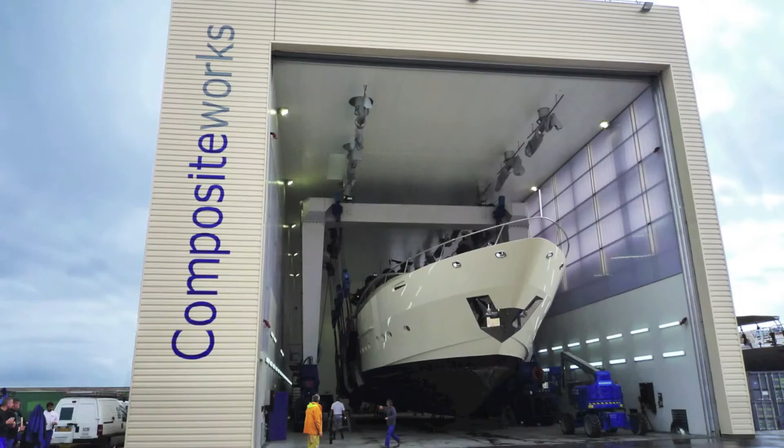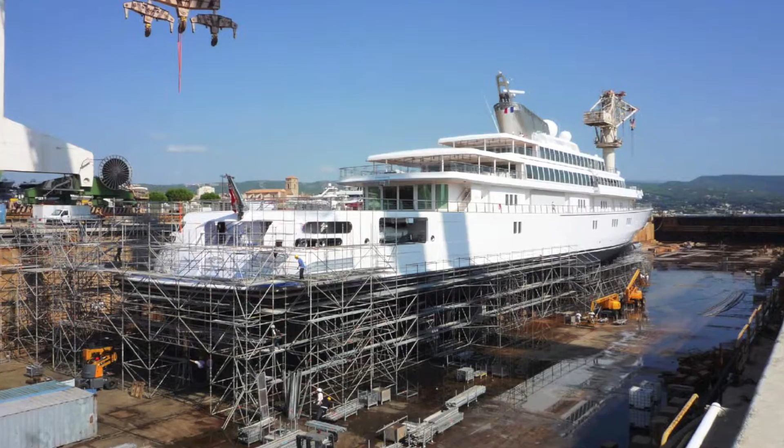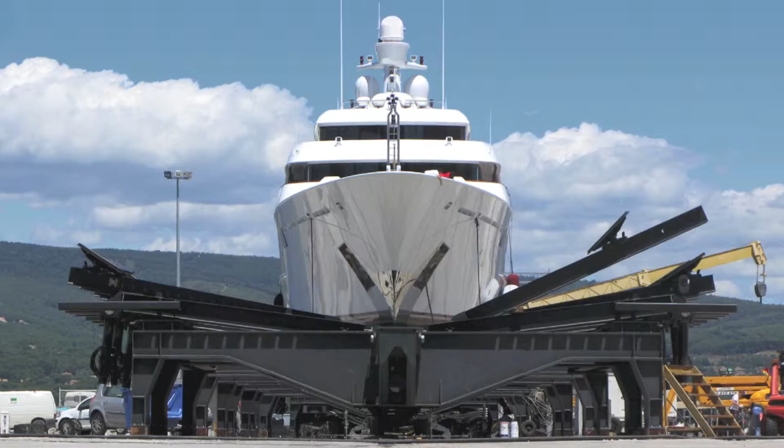At the heart of this hub is Compositeworks, founded in 1998, one of 34 specialist companies based on site. The site itself is run as a cooperative by Semidep, a government-funded company that maintains the communal facilities including the 2,000-ton Synchrolift and the 360-metre dry dock.

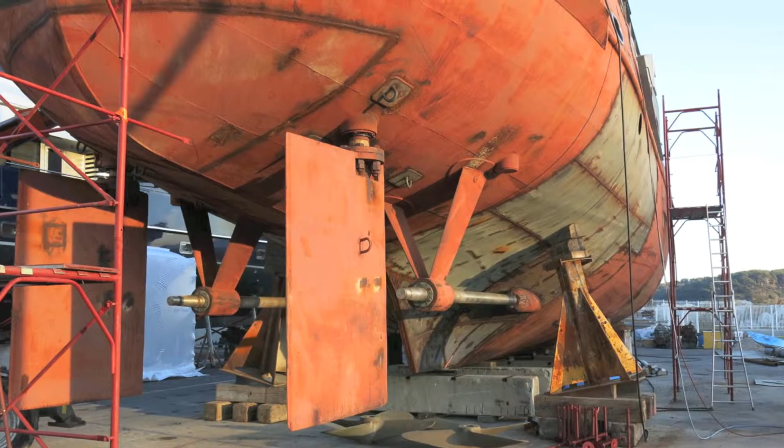With Compositeworks recently completing its 800th refit, we asked Operations Director Rob Papworth how the company was performing. We did have a sort of slightly static period for a couple of years, and now we've definitely moved on again. This year we're due to increase our turnover by around 20%, which is a pretty decent jump in the state of the market right now.

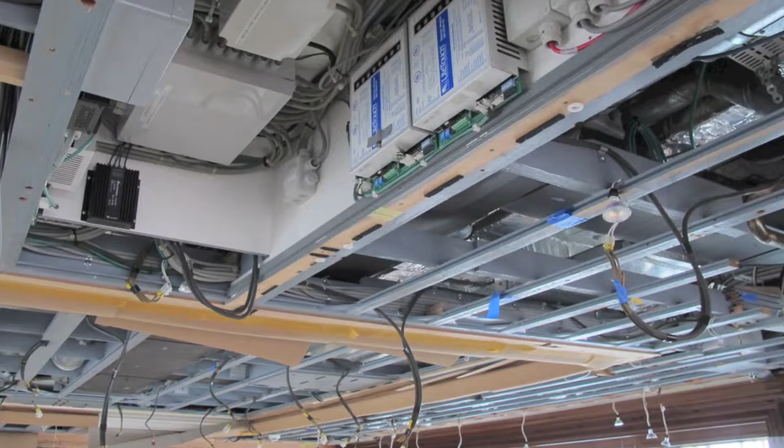We've seen an increasing amount of American clients. We believe that a lot of the difference comes from people really beginning to trust in the refit industry as a whole, and there's a group of yards, I think, that people are beginning to trust as much as new build yards, and the scope of works being done now in refit yards is becoming increasingly large, whereas before people were definitely taking vessels for modifications back to the new build yards.

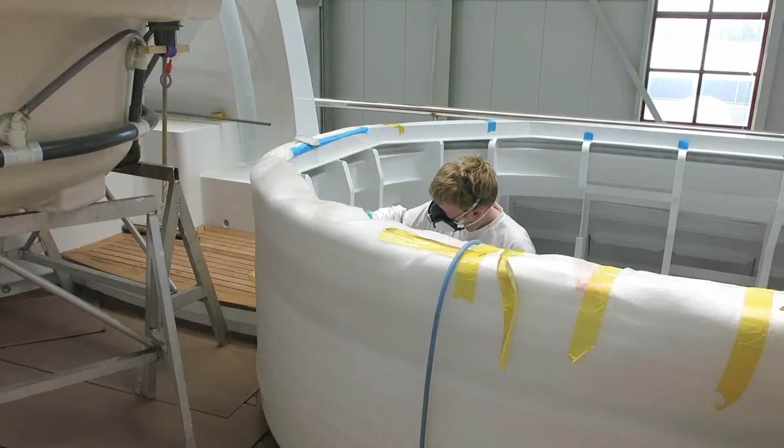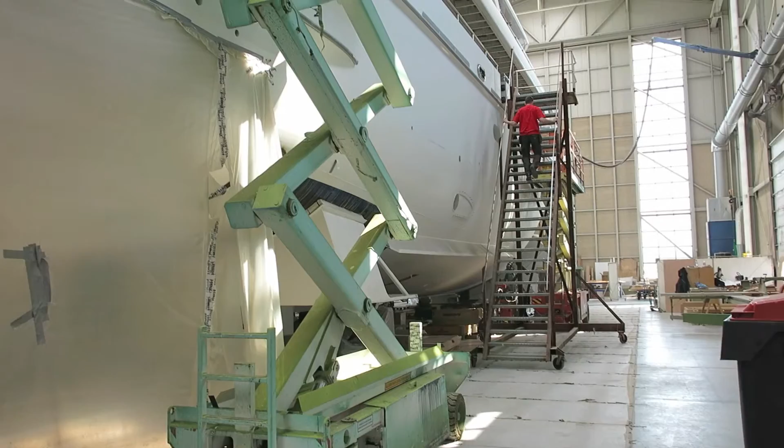There are a lot of vessels on the market at the moment, and people are doing modification works to low cost purchases. The large yards are very full at the moment, and people with 80 metre plus boats, if you want a new 80 metre plus boat from a reputable yard, it's quite likely you'll have quite a long wait, and people in that kind of market that decide they want a new cinema or a new swimming pool or whatever, they're not going to wait 5 years to get it on their new boat, so they're doing those modifications right now. We at Compositeworks have certainly seen a lot of growth in the 80 plus metre market and the 100 plus metre market as well.

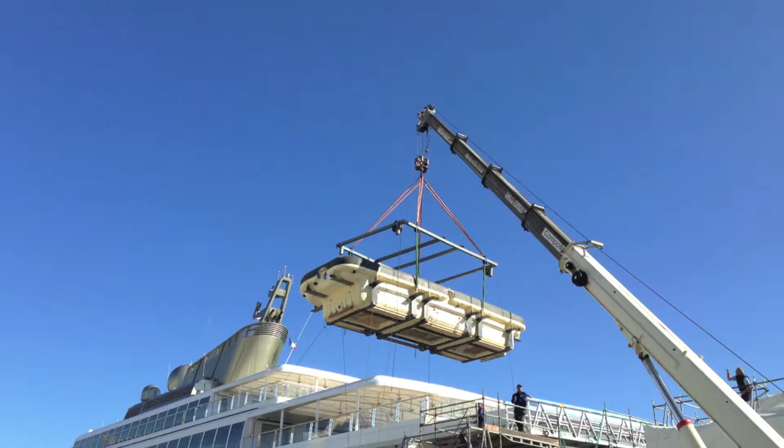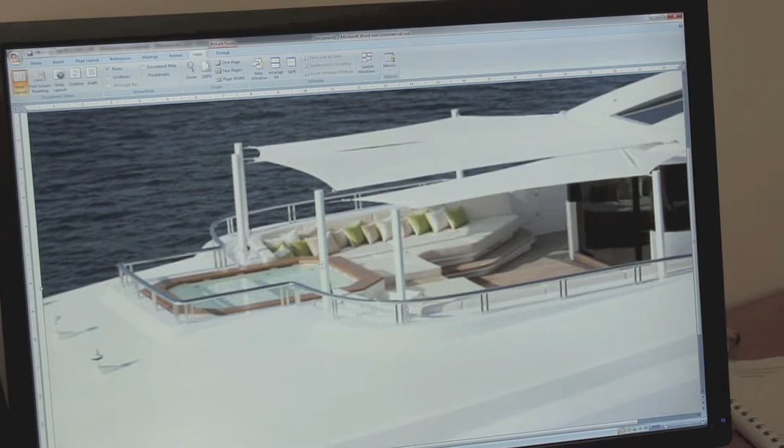In fact, fitting new or improved swimming pools has become something of a speciality at Compositeworks, and John Stott, the in-house naval architect, showed us a current project. We have here a shot on the screen of the original pool, which is quite shallow and has limited capacity in terms of people and water, and we've been asked to increase the size by about double, and we've overcome the issues of stability, which is often the problem these pools have, by putting a large storage tank down in the bottom, in the bowels of the boat, where the water goes and remains in condition and temperature ready for use.

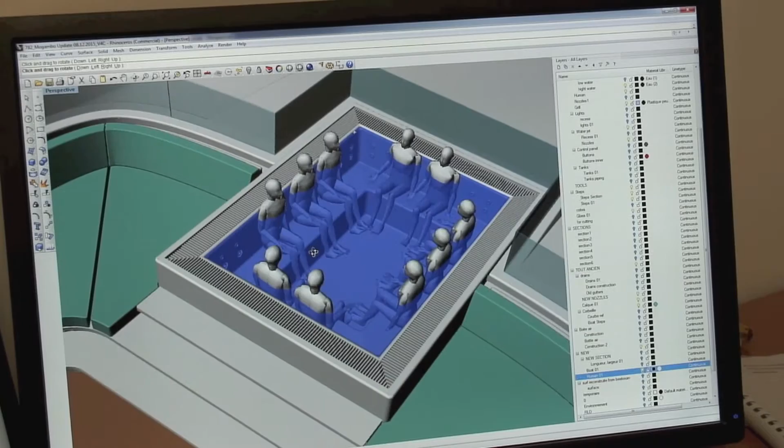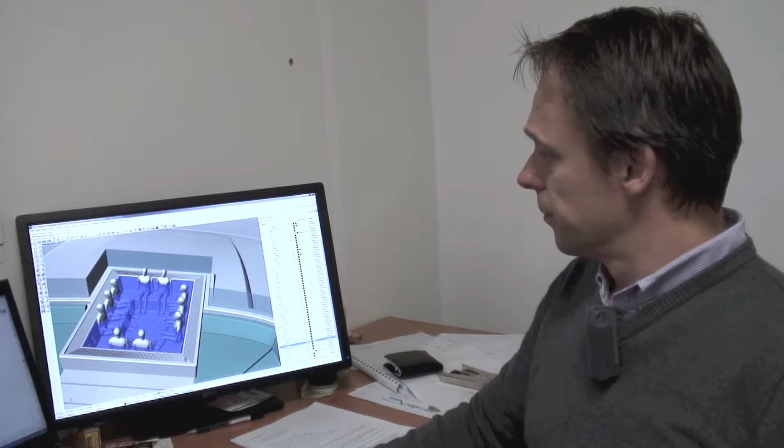We've also looked at the issue of water spillage over the sides, which is a common problem with vessels, especially smaller craft like this, by putting a large drain gutter in the sides of the pool, which will cope with the rolling of the vessel and the water spilling over the edges, and pump the water back into the pool on a continuous basis.

A lot of our growth has been due to the quality that people saw in our paintworks, and historically we've had a lot of paint jobs. In fact, this year and a bit, the trend for the last 2 years is we've actually had fewer paint jobs, even with the growth in our turnover, which has mainly been due to the fact that we've been taking on more technical jobs, larger jobs, extensions, superstructure modifications, interior modifications, and those kinds of works. So we've done less of the smaller paint-only type refits.

Obviously we're still doing some big projects. We're doing an 80 metre now and another 65 metre. But yeah, with the increase in the larger jobs, it's become less of a major factor in our turnover.

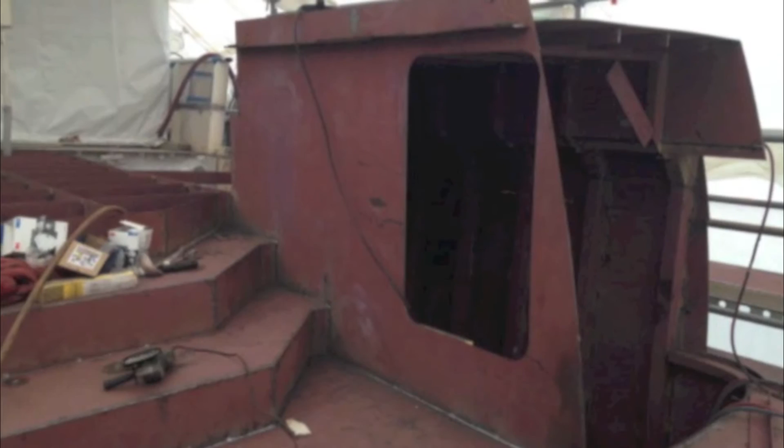One recent project has been the 5-metre extension of this Explorer yacht, which was achieved in record time thanks to 3D scanning. The owner had a fixed date in his schedule where he wanted the boat to be, wasn't able to move, and so we had 3 months to do this job, which was a big job. We were able to scan the boat with a digital scanner and then start prefabricating the parts on site, so when the boat arrived we were able to cut the existing transom off and then bring the part towards the vessel once it was hauled out. 3 months was pretty tight with the machinery installation inside, the painting and everything, but it's possible with good planning.

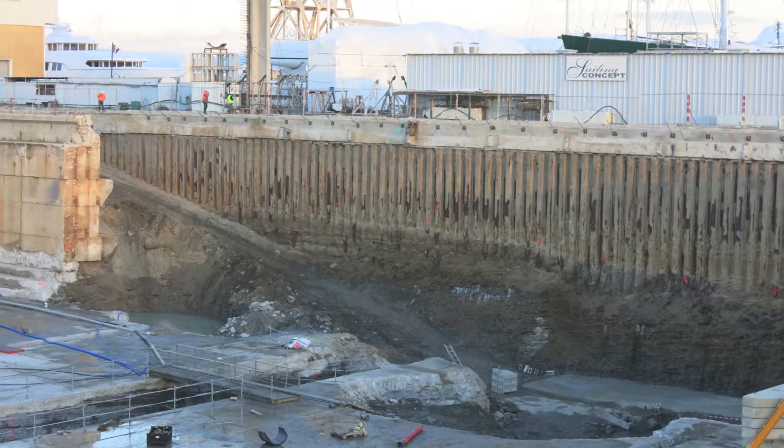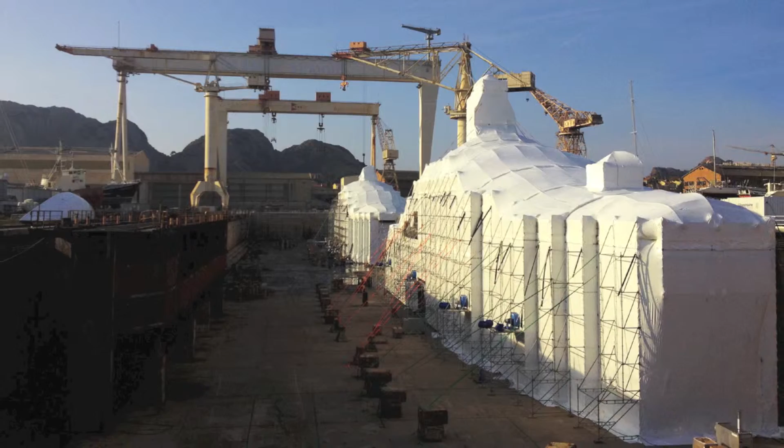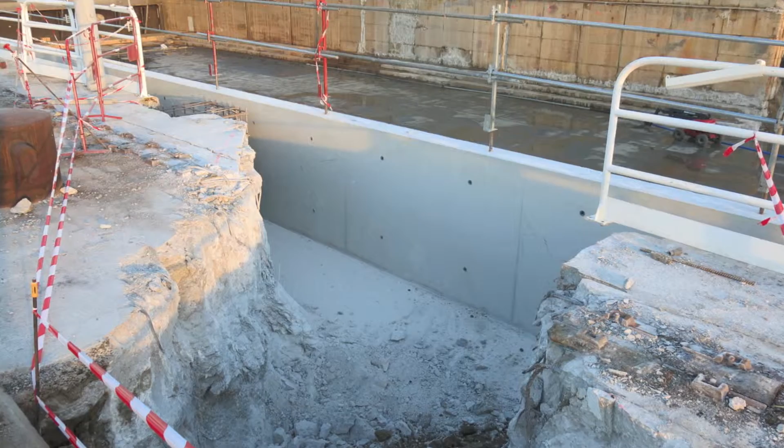In 2013 we had seen 2 projects dwarfed by the dry dock, but in January 2016 the dock was empty and undergoing a €16 million shortening. A new sill was being put in to reduce the length. I think the idea is that it will make this dry dock more attractive because it's more usable and more up to date. At the same time they're modernising it, making better services and updating all of the electrical supplies and the logistical parts, and they've changed the geometry of the quay to be better suited to superyachts, so it will be a more modern facility to mirror those in other places.

But the main advantage really is to gain some extra quay space here for the boats, because we're so often full here now in La Ciotat. Space is at a premium, which 15 years ago was very hard to believe that we would ever fill the yard up. Having enlarged and restructured its technical team, and with a big investment in crew facilities, Compositeworks is looking forward to a busy year. But in the yachting industry that doesn't rest, nor can the refit sector.

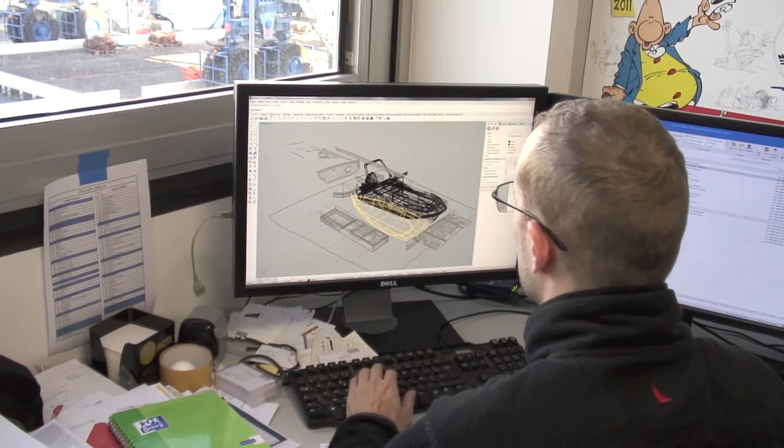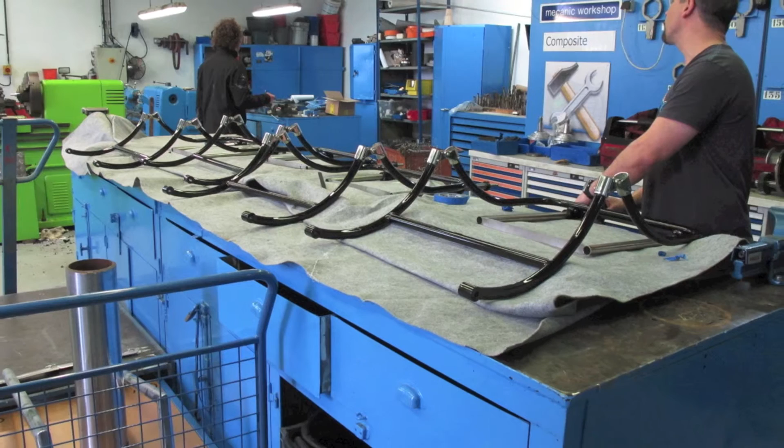We're very conscious as a yard that you can't stand still, you can't say it's gone great and leave it at that, you have to keep investing in new materials, the latest technologies. We just bought a 3D scanning machine this year so that we could scan our boats and cut down times. If you don't invest in these new technologies and offer the best facilities and technologies to the boats, then people will overtake you. I think it's a natural part of the whole package that is essential to attracting clients to the yard.